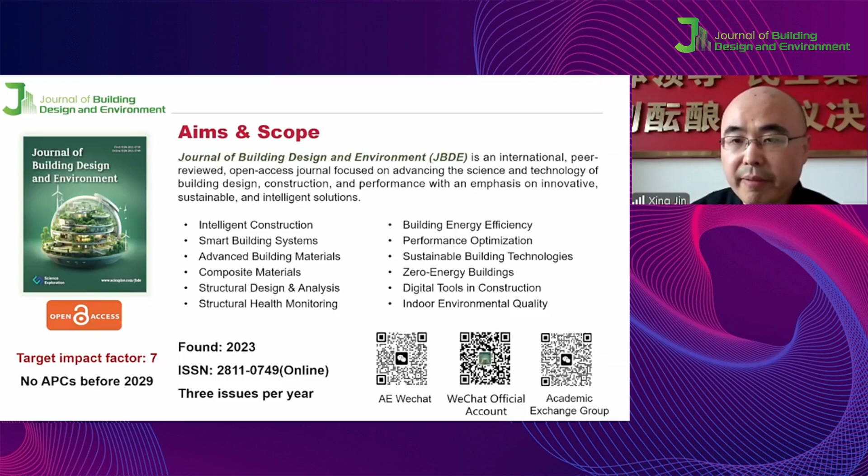You can call it the Journal of Building Design and Environment. This journal was founded in 2023, and we have 3 issues per year. Here you can see the aim and scope of the journal, including building design and structure, indoor environmental quality, etc. Our target impact factor will be 7 before 2029, and we will have no publication fee before 2029. We also have a WeChat account, so welcome all of you to follow and support our journal.

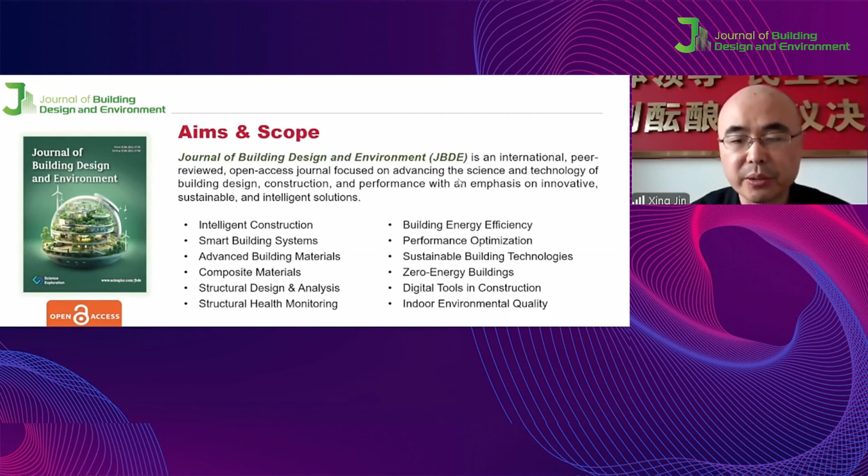The Honorable Editor-in-Chief of the journal is Jian Kang from University College London. He is also a very famous expert in architecture acoustics, and he is a foreign member of the Chinese Academy of Engineering. The 2 editor-in-chiefs are Professor Li Maozhang from Huazhong University of Science and Technology, and Xiangyu Wang from East China Jiaotong University. We also have 9 associate editors, including me, Professor Li from Guangdong University of Technology, Professor Duan from Tongji University, and Professor Hao from Xi'an Jiaotong Liverpool University.

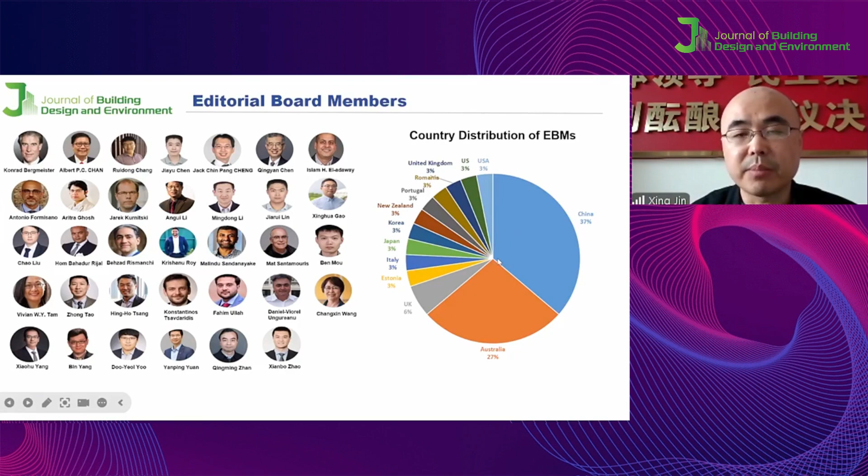They are all famous experts not only in China but also around the world. Most of the members are from China, Australia, and other Western developed countries. This year we also have young editorial board members. Right now we have 47 young editorial board members, and I welcome young scholars to join the young editorial members of our journal.

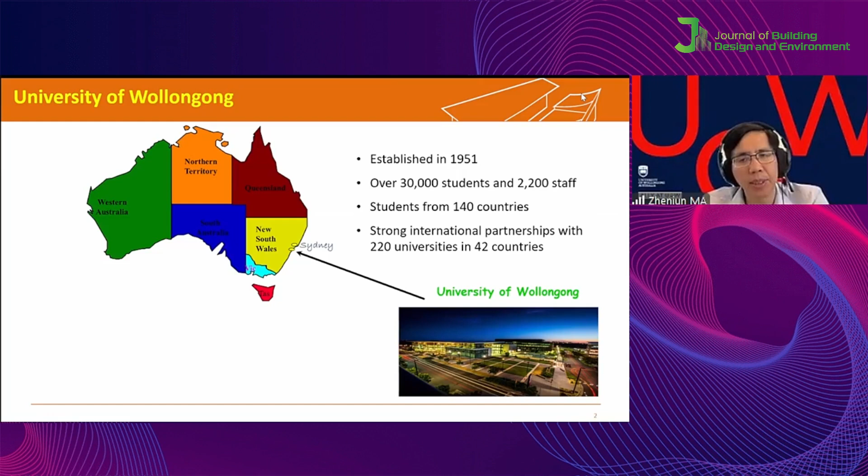Our university is around 70 years old, and we have over 30,000 students. We are really international, with students from 140 countries. You can see some local, quite famous places, and we always welcome visitors in our region.

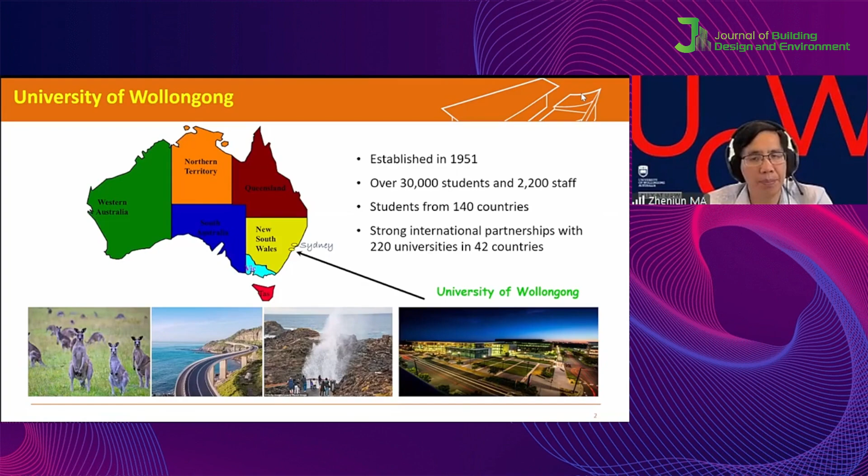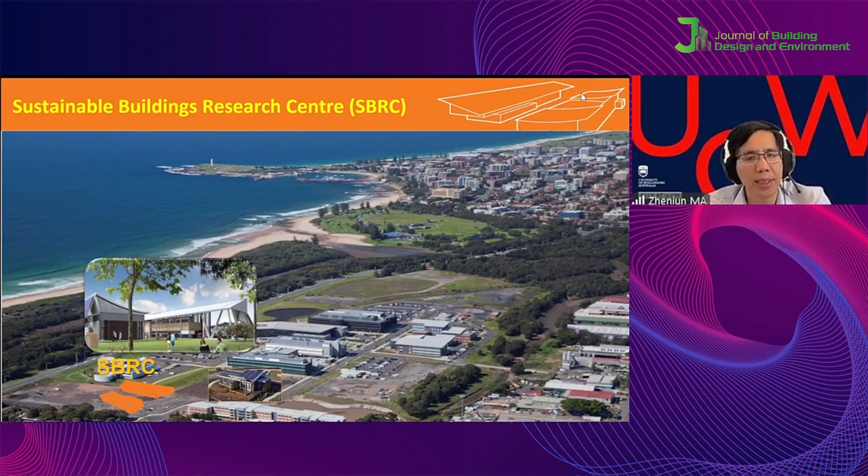This is our city, and my research group, SBRC, the Sustainable Buildings Research Centre, is here. It's very near the sea, only a 5 minute walk.

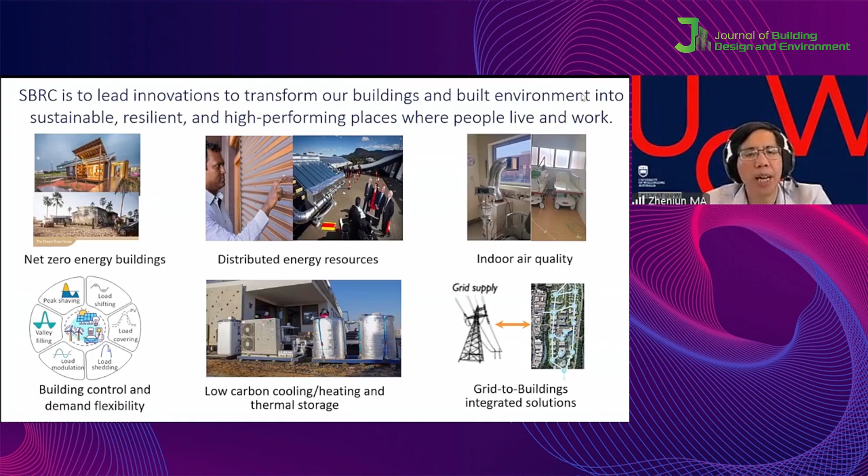Our team works on a range of research activities: net zero energy buildings, distributed energy resources, and indoor air quality building control. That's all part of our research activities.

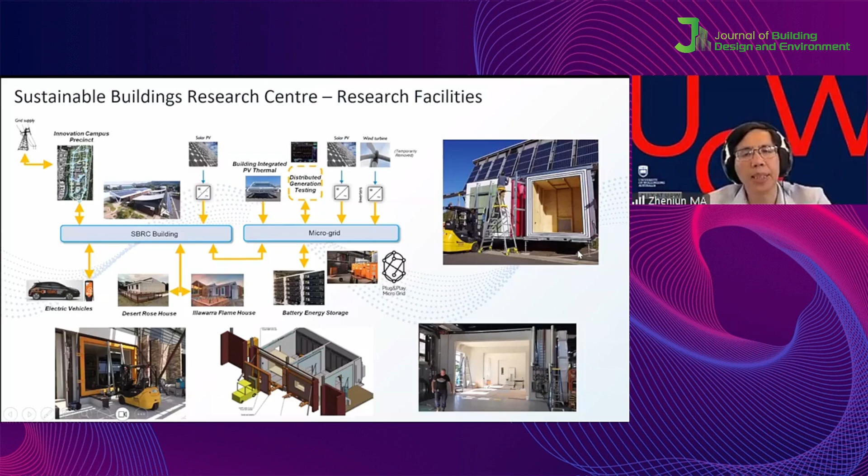We have also set up a range of living labs to support our student projects and research activities. We also have a range of research facilities, including the microgrid test platform, building integrated test facility, and outside test cells. These all support our research here.

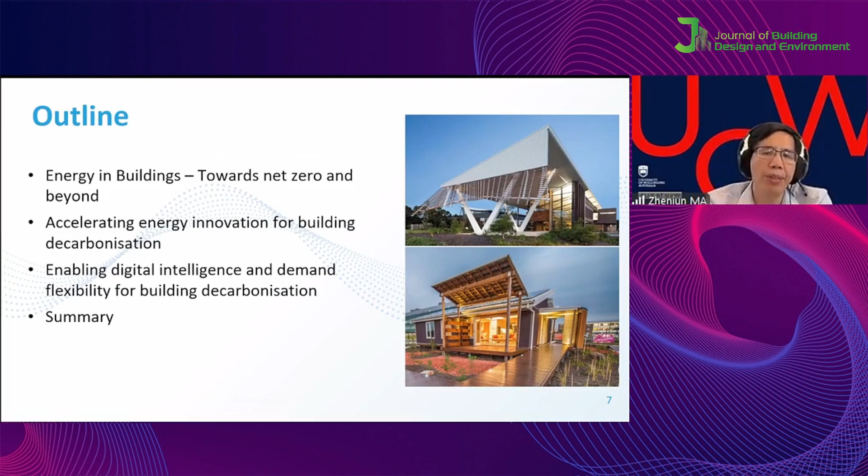For today's presentation, I will start with an overview of energy in buildings and key activities in Australia and beyond. Then I will give you an overview of the research activities my team is doing on accelerating energy innovation for building decarbonization, and digital intelligence and demand flexibility for building decarbonization.

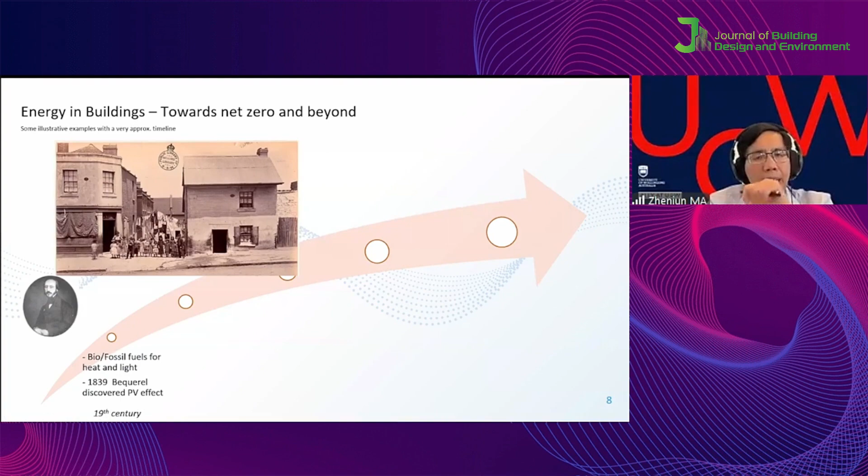This is the journey of net zero efforts from Australia and also in our team. In the 19th century, biofuels and fossil fuels were really used for heating and lighting. Then the PV effect was discovered by leading researchers. Then came the later part of the 1900s.

Solar thermal became common, and remote area power systems for off-grid homes also became popular. At that time, batteries and diesel backup were also used, and PV panels were increasingly used. Small-scale wind turbines were used, but that was not very competitive from a cost perspective.

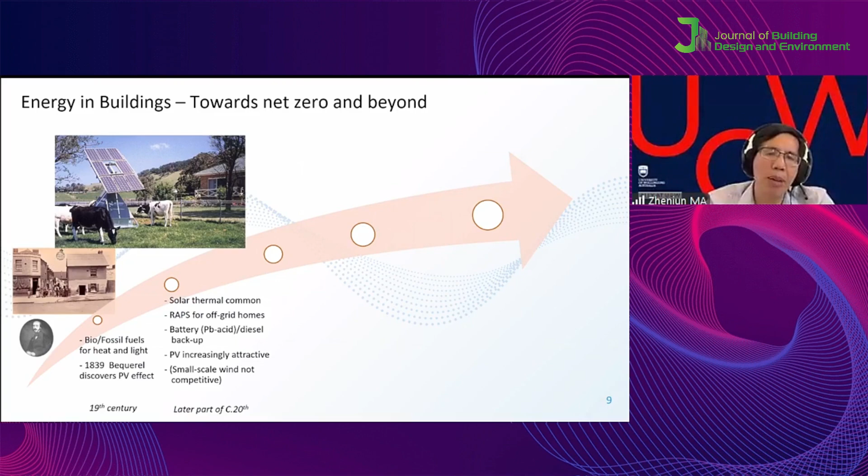Then came the 2000s. In Australia, we had our first 6-star building, the Council House 2 building in Victoria, Melbourne. In this building, they used a range of high performance technologies, including phase change material in the building for storage, load shifting, and load shaving.

The digital building management system was also used in this building. Many of you may know that in 2002 in the United States, they started the Solar Decathlon international competition.

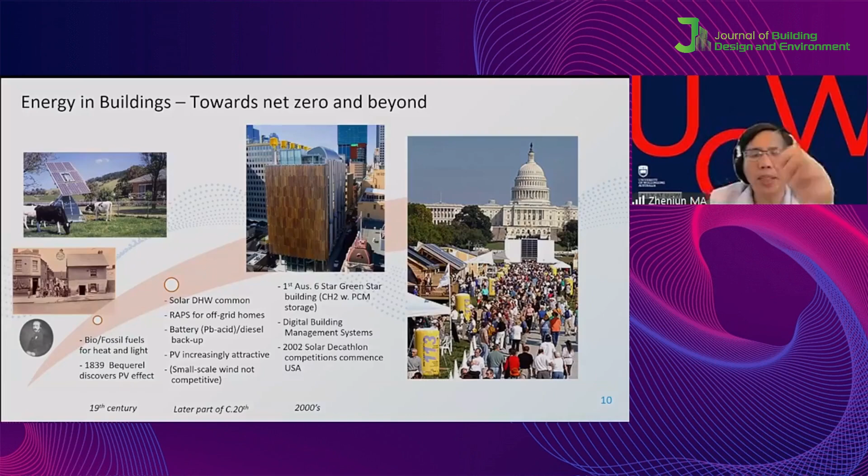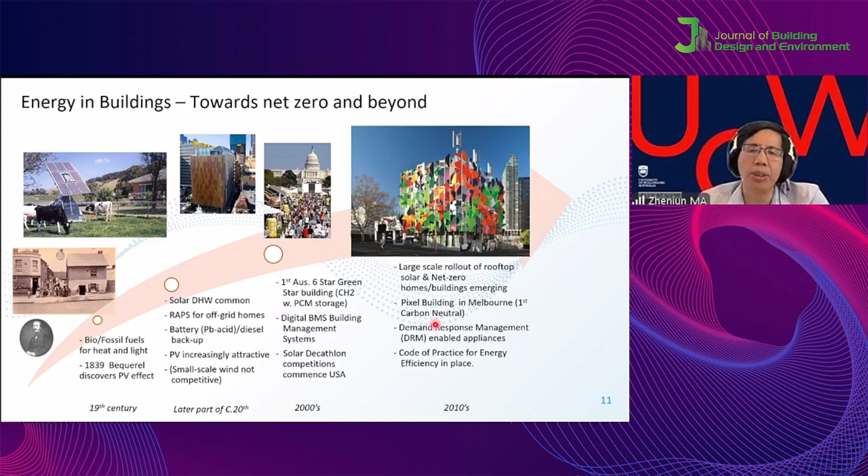Then came 2010, with large scale roll out of rooftop solar panels, and net zero energy buildings became very popular. In Australia, our first carbon neutral building was developed. At that time, demand response management enabled devices also became popular in homes and office buildings. From a government policy perspective, the code of practice for energy efficiency was also put in place.

So what's happening today? In Australia, 38% of homes already have solar panels installed, around 4.3 million homes. You can imagine these solar panels generate significant amounts of power during the daytime.

We need high interaction with the grid system, because during the daytime homes don't really need a lot of consumption, and most of the generation is exported to the power grid system. This causes a lot of issues for the stability of grid operations.

From 2015, around 3,000 megawatt hours of battery storage was installed, especially in recent years. The Australian government has put a lot of support into installing battery storage systems behind the meter.

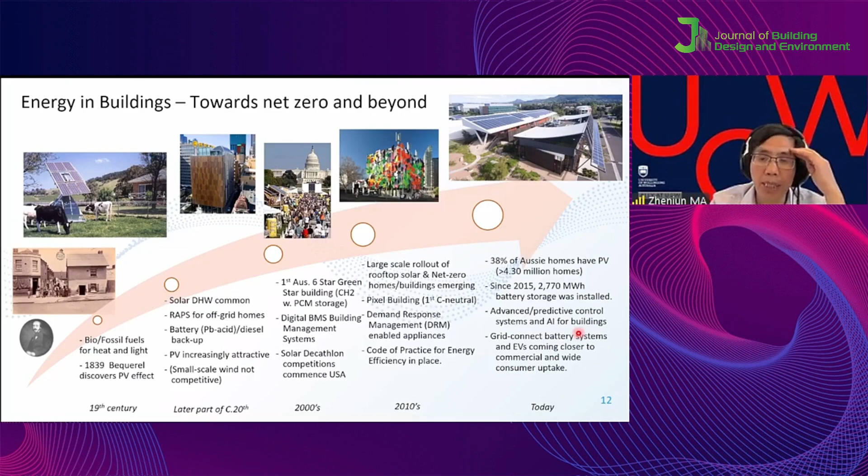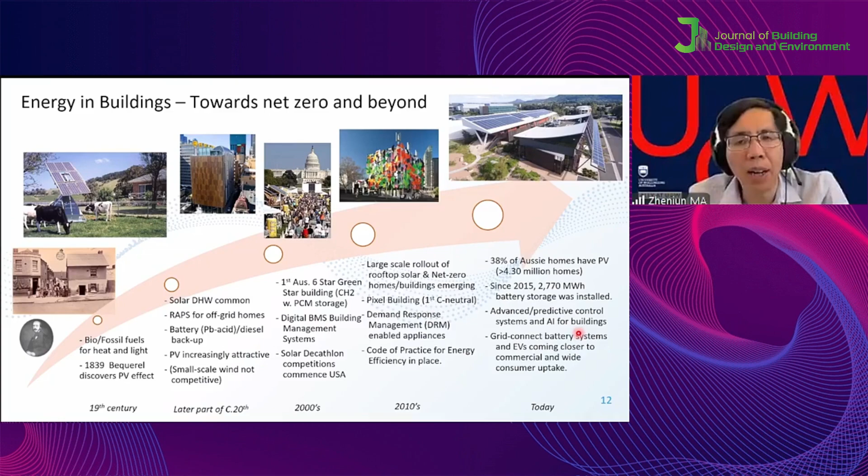Some of you work on advanced controls, such as MPC, model predictive control, which is also being tested in buildings, and AI technologies are also starting to be used in buildings. Lots of activity is happening on grid connected battery systems, and EV cars are also close to commercialization. You can see vehicle to building, vehicle to grid, and grid to building concepts - these are all topics currently under investigation.

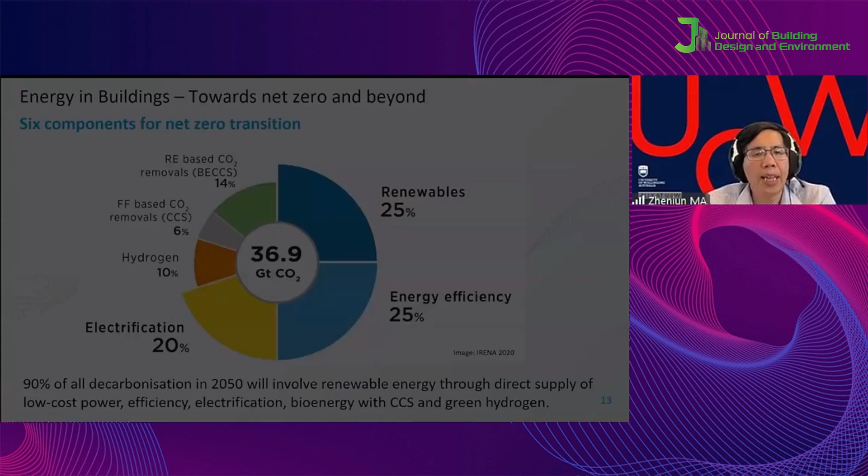Building decarbonization is not only for energy efficiency, we rely on a lot of technologies. Renewable technologies and electrification are also equally important. All in all, we need to look at all the different ways to reduce carbon emission from buildings. This is from a study by the International Renewable Energy Agency, which identified 6 components for net zero transition. This is an introduction to some work my team has been doing over the last couple of years on how we can help translate our research activity to reduce carbon emission from buildings.

One of the key technologies we studied is the transpired solar collectors. You can see on this facade we installed transpired solar collectors, with perforated panels containing a lot of small holes. If you look at this figure, they have a small fan in operation. When the fan is in operation, the pressure inside these channels will be negative. This is the perforated sheet. The outdoor air will flow through these small holes.

Because you have strong solar radiation on the facade, the air will be heated up, and under very good solar radiation on sunny days, this can reach 25 degrees or even higher hot air. This hot air can be directly introduced into the indoor space for space heating in winter. This technology is really based on good design principles, so the power consumption from the fan is very small. It's nearly a passive application using advanced design to facilitate heating in buildings.

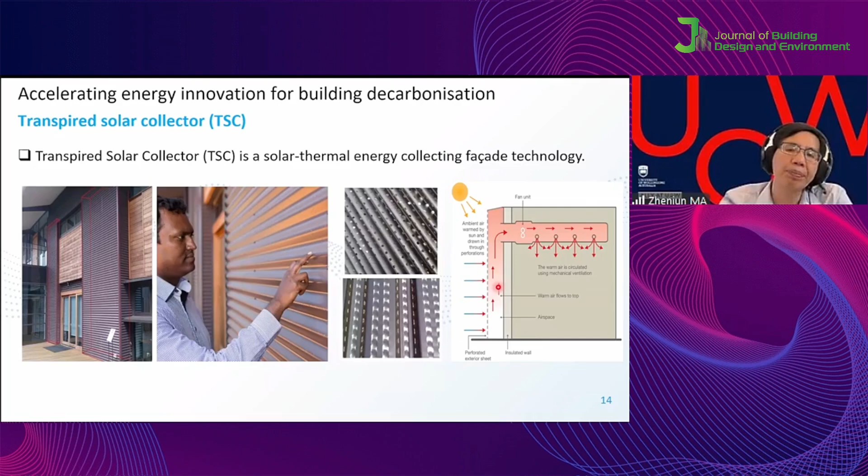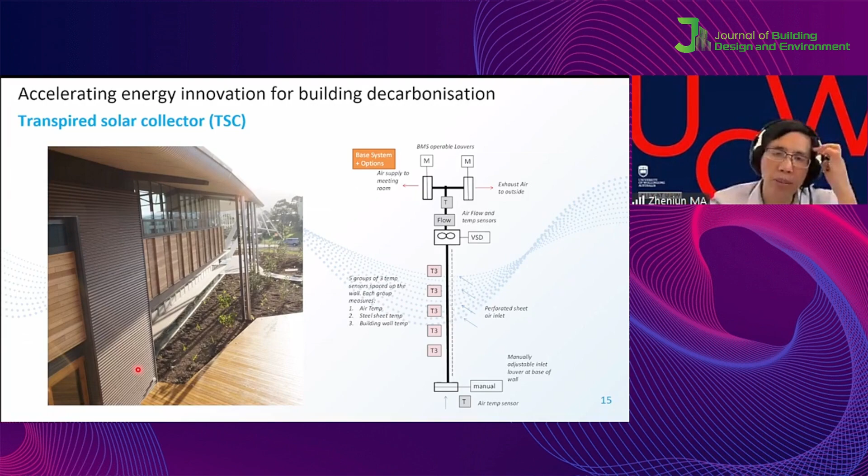We also did a range of measurements for this facade, installing a lot of thermocouples and flow meters to quantify the benefits. We also looked at the diameters for the holes, or opening a big opening at the bottom, to see which is the best option. We ran different scenarios to determine the optimal configuration and design principle to support this kind of facade technology.

Here are some measurements we did. When we look at different air flow rates, you can see the different outlet temperatures from the transpired solar collectors. In principle, with a smaller air flow rate you get a higher temperature. In good weather conditions, the outlet air temperature can reach 50 degrees C, which is very useful in wintertime for space heating.

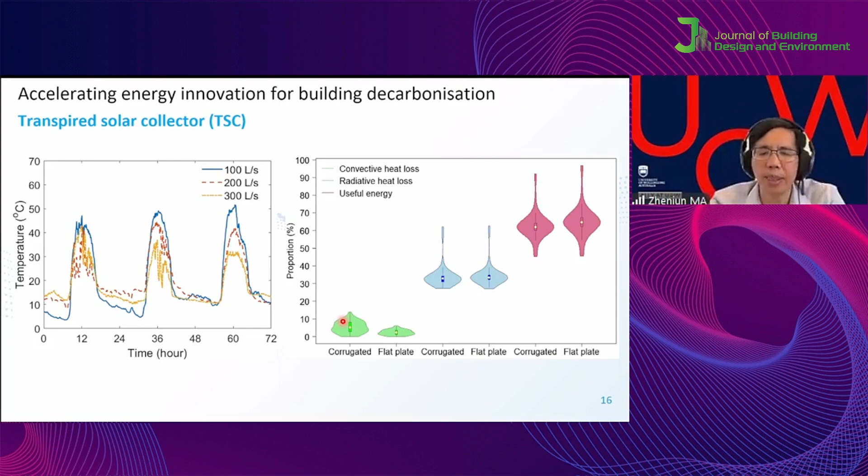If you look at the right side figure, we compared different types of panels - one corrugated panel and one flat plate panel - looking at the heat loss from the panels: convective heat loss, radiative heat loss, and useful energy. This is really about how to ensure a very good design to make buildings more efficient. That's one technology, and we also looked at options to integrate thermal storage.

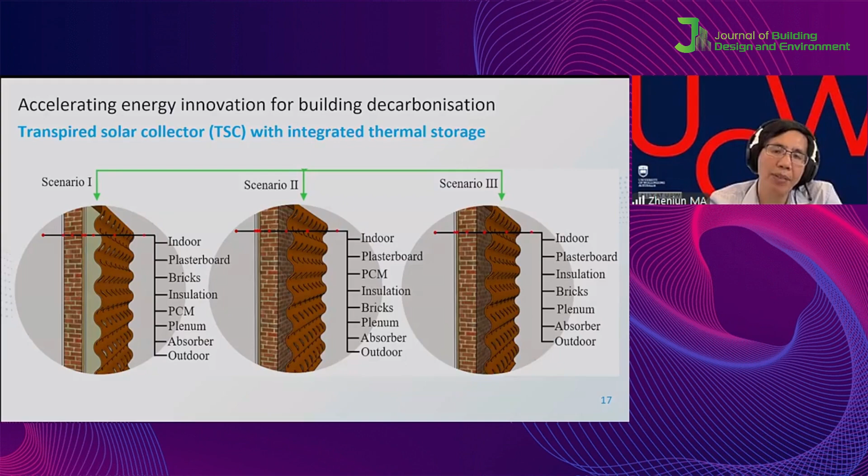In this case, it's combined with phase change materials, which you can either install in the internal layer or outside next to the perforated panels. We also have the scenario without using any thermal storage materials, to see which one provides better results or outcomes. This is some simulation work based on these 3 scenarios, looking at the indoor air temperature perspective for the winter scenario.

We need a higher indoor air temperature. You can see that when you combine the transpired solar collector with thermal storage using phase change material, they show a higher indoor air temperature. The temperature seems very similar when compared with the transpired solar collector alone, but both are much higher than the baseline scenario.

The benefit of phase change material really relies on the way you place the material and how much material you use - there are a lot of factors. If you look at the right side figure, this tells us the average room temperature when the fan was off, without fan, across different days.

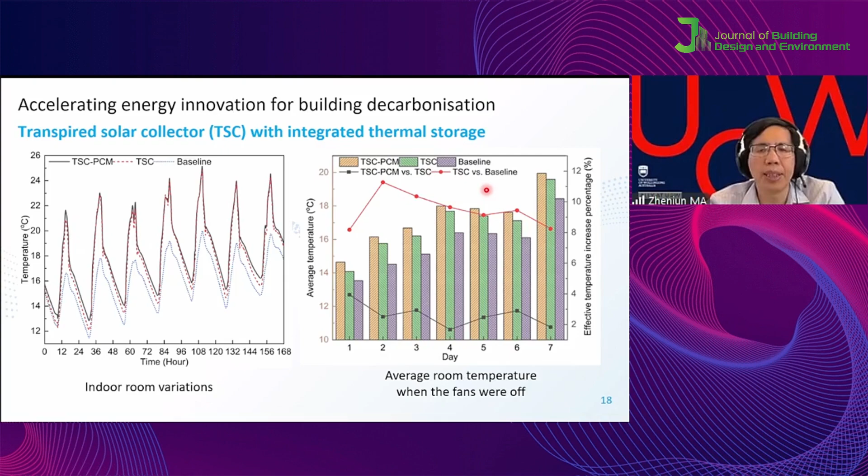If you have the transpired solar collector and thermal storage using phase change materials, you can have, in principle, a higher average temperature compared to the other case. So this really demonstrates the value of the transpired solar collector and phase change material. But behind this technology, there are lots of design issues and design optimization.

So the second technology we developed is the photovoltaic thermal system, PVT. In our case, we developed an air-based system. Why did we develop an air-based system? In Australia, you can see a lot of roof structures are like this, still steel roof structures. So the idea is we can retrofit existing buildings by using this existing roof structure.

For instance, in this roof structure, you have lots of valleys. So the idea is to just put a layer of thin film PV panel. You have one layer of PV panels, and you can use these valleys and channels for the air channel. So this is a very low cost retrofit solution.

This PVT, in the summer daytime, gives you PV generation and hot air generation. Many of you may know that when the temperature of solar panels increases, the efficiency for electricity generation decreases. So if you have air passing through below the panels, it can reduce the temperature of the solar panels and can slightly increase the electricity generation efficiency.

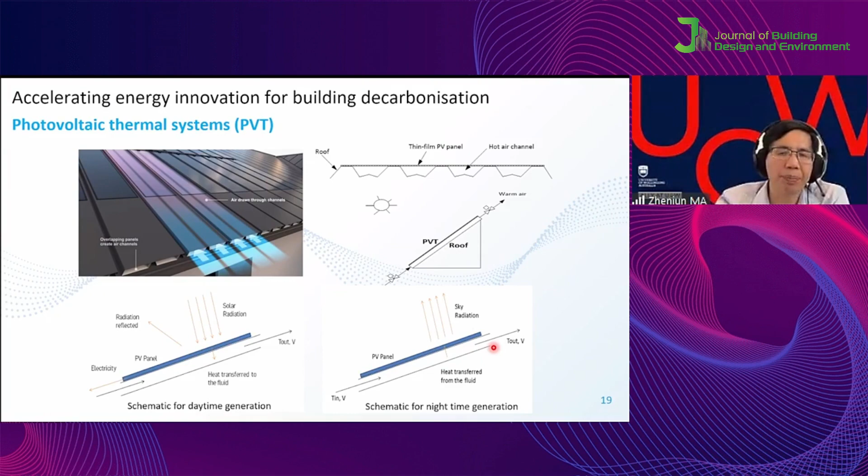We also look at how to increase the performance of these kinds of panels. For instance, we look at the combination of PVT and the solar air heater together. This really tries to increase the outlet air temperature from the PVT system. We also look at using heat pipes to increase the outlet air temperature.

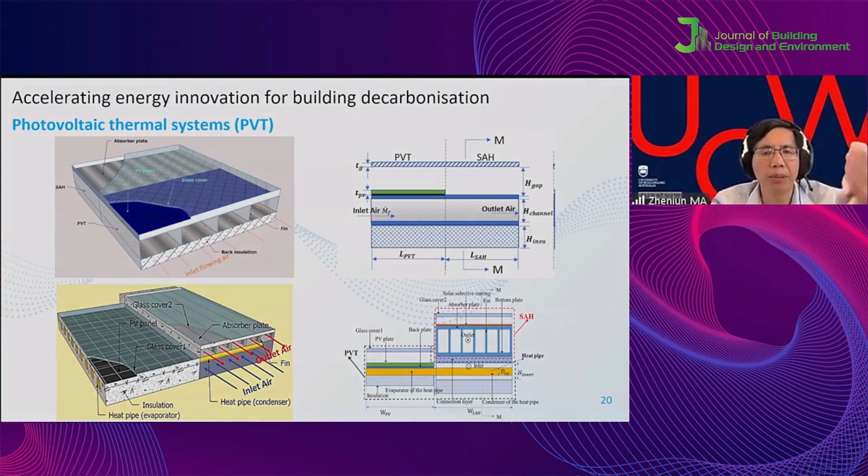They really track the solar radiation. You can also change the slope of the panels, because the slope of the panels is also a factor influencing the efficiency of the PVT system. You can also vary the air flow rate to test the performance of such technology.

To look at the integrated performance with thermal storage, we also installed a thermal storage system to store the hot air from the PVT system. In this case, we use salt hydrate material and put it in brick style, placed in the channel, to measure and evaluate the performance of such an integrated system.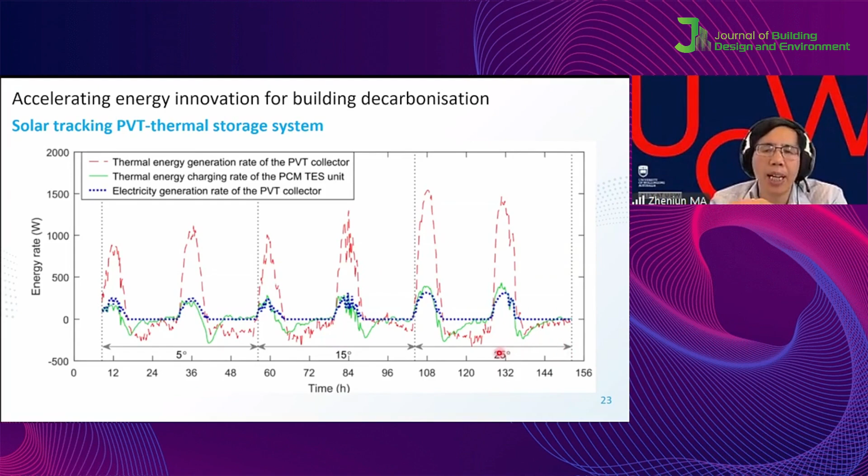And you can also say, from the slope of the panels, you have different slopes and different efficiencies. This really depends on the climate conditions and location where the PV panel is installed.

We also look at the combined PVT system and thermal storage integrated with the HVAC technologies. So this is one example we developed. We have PVT collectors and a PCM thermal storage integrated with the air handling unit, which is integrated with the heat pump unit. This system can provide different options.

For instance, in the wintertime, you can directly supply hot air to the buildings, or you can preheat the air, then use the air handling unit to further heat up the air. Or you can charge heat into the PCM storage and use it later when needed.

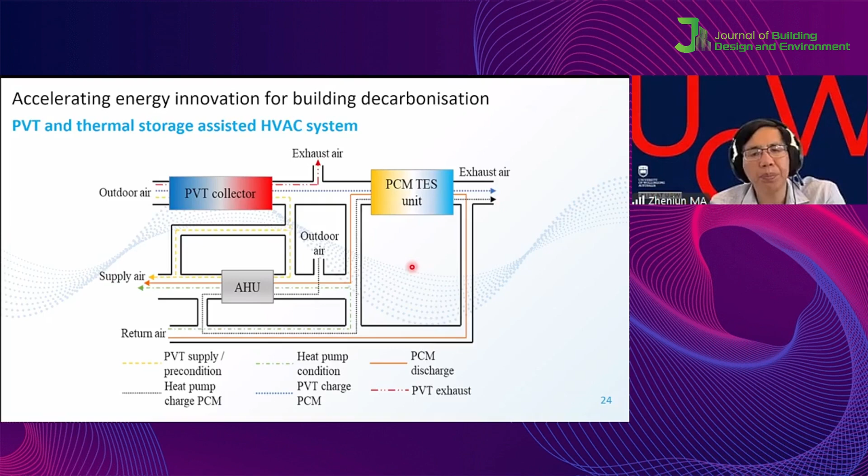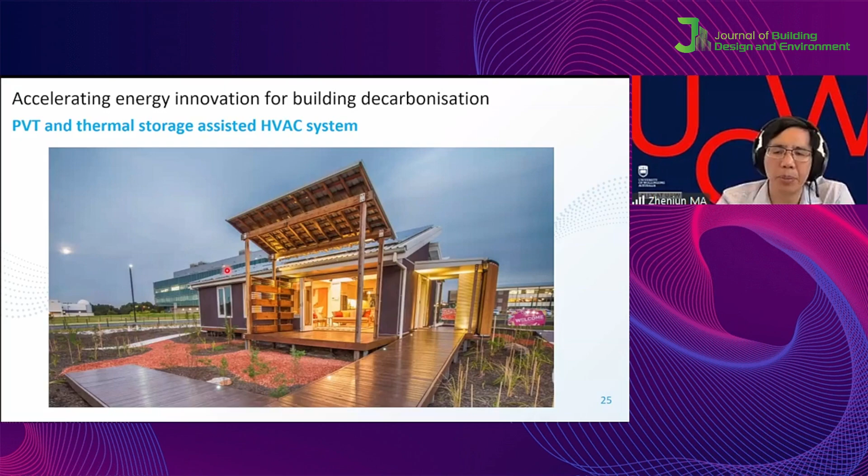So we installed this system in this net zero energy building, underneath the house. We installed this thermal storage, and the PVT is on the rooftop. This part is our PVT system, and in this system you can see this is our air-based PCM thermal storage. We installed it underneath the building, and this is our control infrastructure.

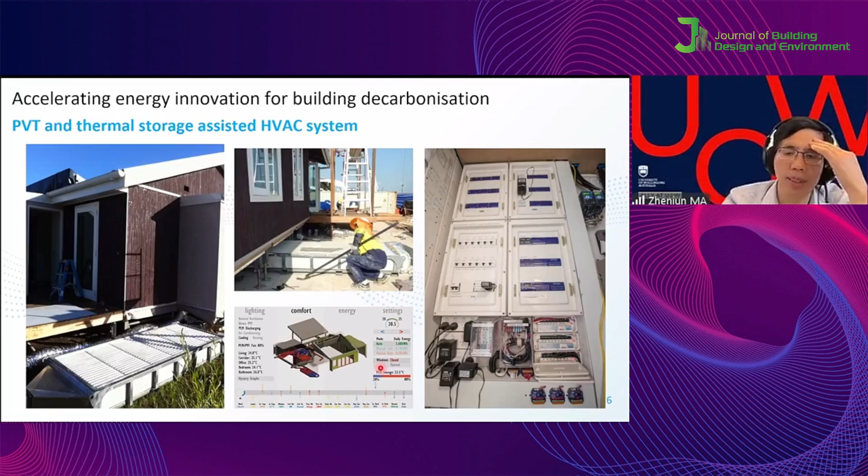We developed this to optimize operation for the PVT, air conditioning, and thermal storage through this interface we developed. Here is an example of the hybrid model predictive control we developed for this system.

We use two different layers or levels. One is the high level controller, which really determines the operation mode of the HVAC system, for using the air handling unit for heating or cooling, or using the PVT for preheating. This is based on a time interval of 1 hour.

Then we have a number of low level MPCs to optimize the local level, such as the PVT air flow rate, and the charging and discharging of the PCM storage. All this is communicated from the JACE controller, and we use LG air conditioning, the JACE controller, the C-bus, and the weather station.

So that is really a demonstration of the performance of the air conditioning system and also high performance advanced control strategies. In this case, we use MPC.

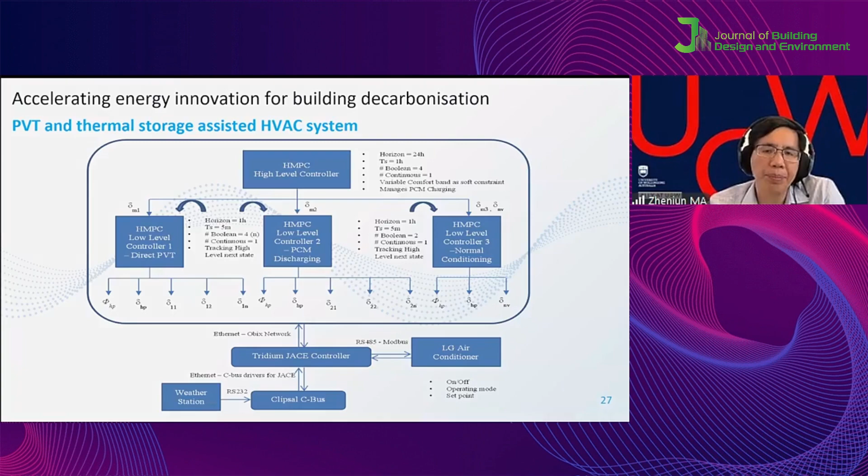This is some measurement data. You can see, in principle, the indoor air temperature is within the required threshold, that's the upper limit and lower limit for thermal comfort. For instance, this time we use the PVT for pre-cooling, and here we use the PCM for discharge. So this is one example.

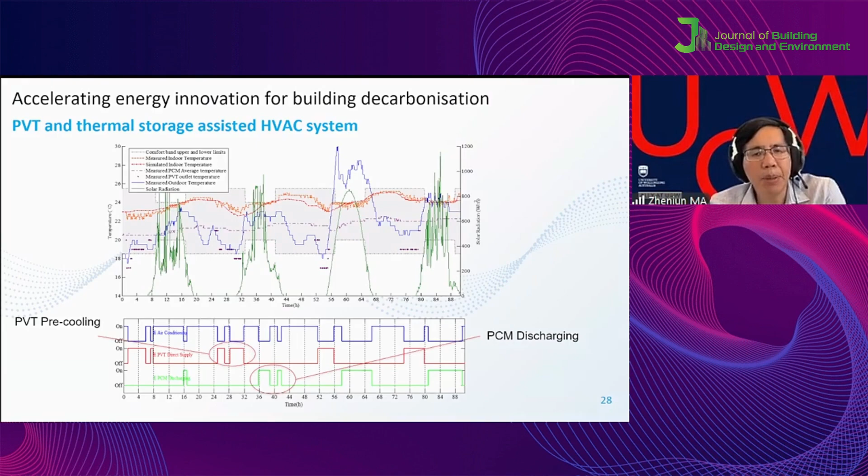We also have another example installed elsewhere. In the previous one we used an air-based system, but in this case we use a liquid-based thermal storage, that's the two thermal storage system. We still use phase change material integrated with heat pumps, and we also use energy recovery ventilation to try to reduce the power consumption of buildings.

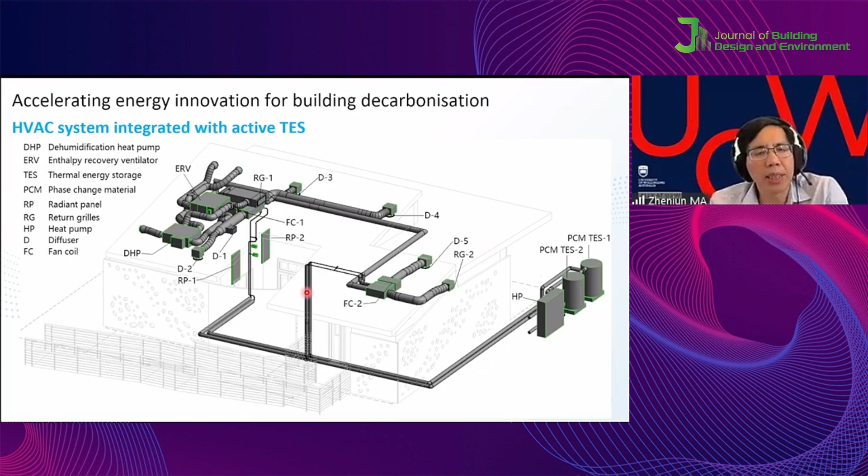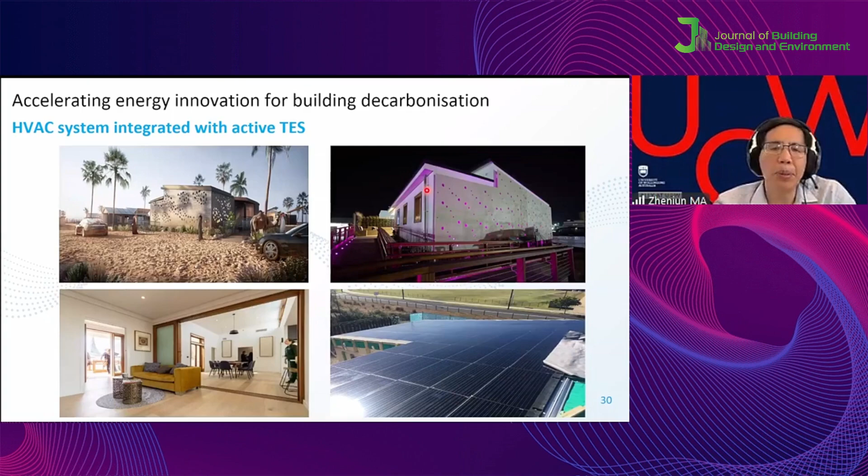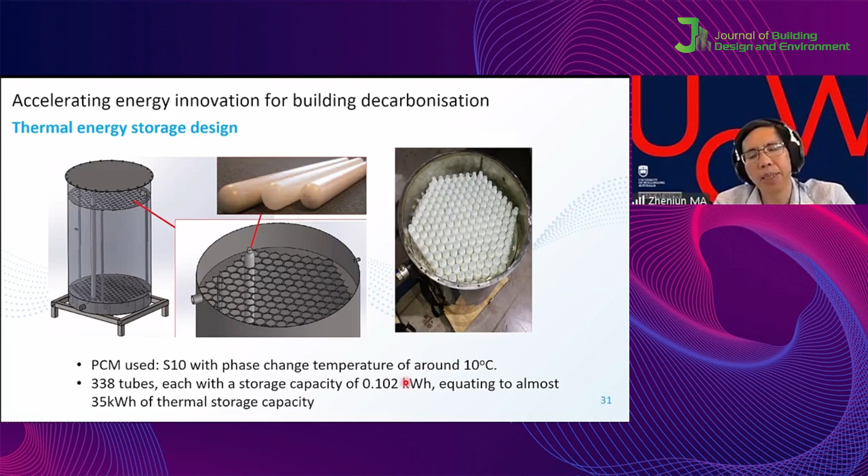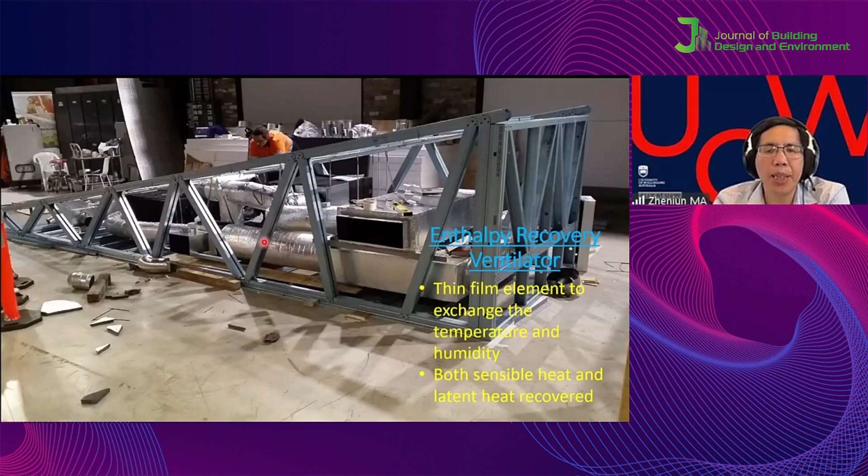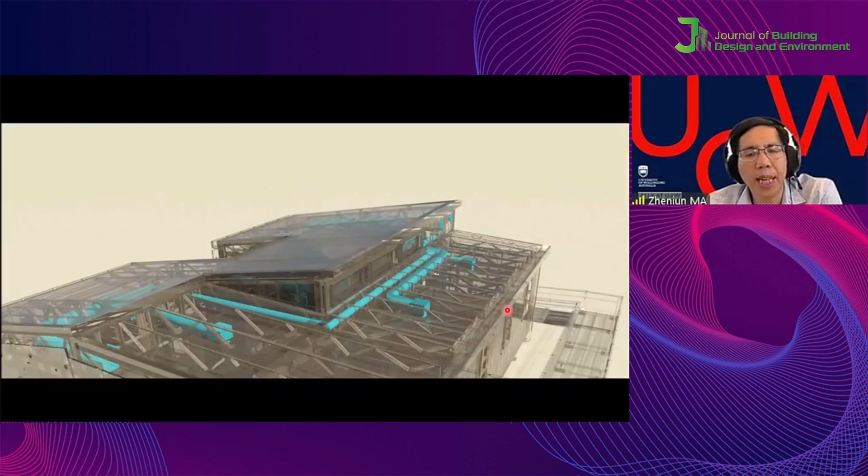You can see these are the 2 PCM tanks we installed in the building, integrated with a heat pump unit to provide heating and cooling. This is for the real building installation. We also have an enthalpy heat recovery ventilator put in the cage of the building, installed on the roof of the house. You can see that's our layout for the air conditioning units, the ducting system, PCM thermal storage, and heat pump unit installed.

In the design stage, especially for the PCM tank, we looked at different options for the diameters of the tubes and the distance between tubes, and also looked at different PCM types and what the inlet water temperature would be. So that is collectively a complicated design optimization.

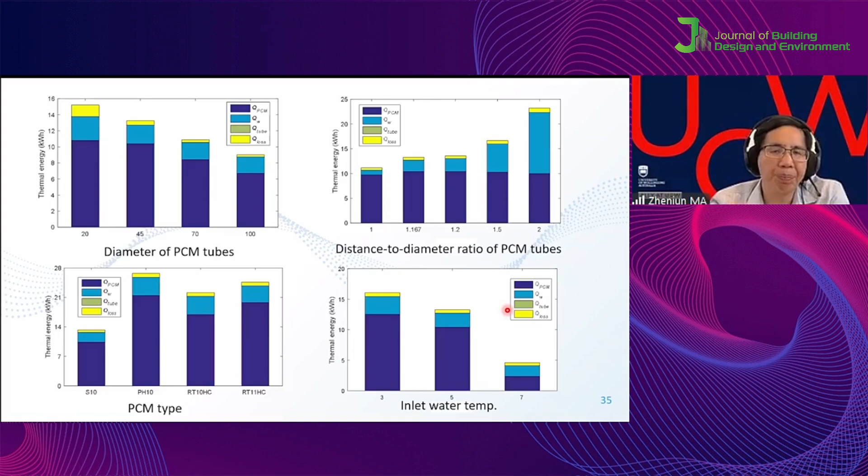So for this system, we also developed MPC, model predictive control, to control the lights and HVAC, and we also have PVT and a monitoring system, and a storage system. We have a 6 kilowatt electrical storage. The purpose of the MPC is to control the real-time power below 80 kilowatts.

That's because that's a very hard target. The red dashed line is before implementation of the controller, and the yellow curve is after implementation of demand response programs. But even with the demand response program, where we shift the demand time, the total power is still above the limit.

Then we implemented this MPC controller, and this is our target. You can see we didn't exceed the limit. At this time we increased the power consumption, and at peak demand time we reduced the power consumption because of the predictive function of the MPC.

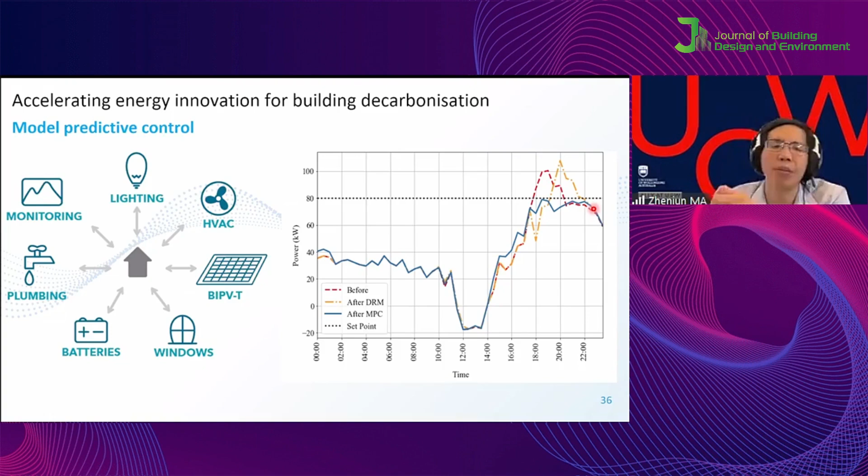Another technology we developed is the air-to-air membrane enthalpy exchangers. In the HVAC system, ventilation consumes a lot of power, so we looked at ways to achieve enthalpy recovery ventilation. We looked at this kind of configuration, and this is really membrane-driven technology. So our work is really to look at MOF.

Many of you who work on the material side know that MOF is metal organic frameworks. We have coatings of different materials on the membrane to look at how they can improve heat transfer effectiveness. This shows the two different types of coating material using the MOF, and for the air, this is the supply side and this is the exhaust side. We look at the coating material on this side or the other.

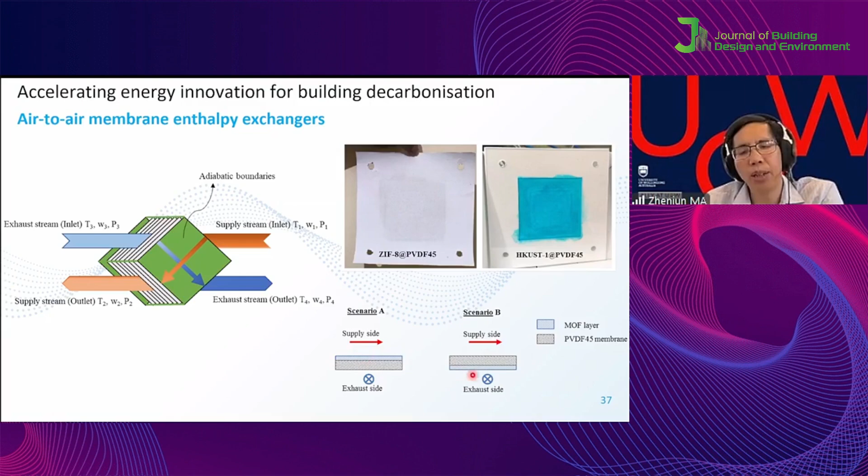We have an experimental setup. You can see we use this acrylic frame to prepare the composite membrane. This is the key test section for the membrane technologies, and we set up this kind of experimental setup.

These are the environmental chambers to control the inlet temperature and humidity. We have two of them, to control two different streams of air. This is the membrane enthalpy heat exchanger, and inside is really this part. We have a vacuum pump, and this is a flow meter to measure the performance of such enthalpy exchangers.

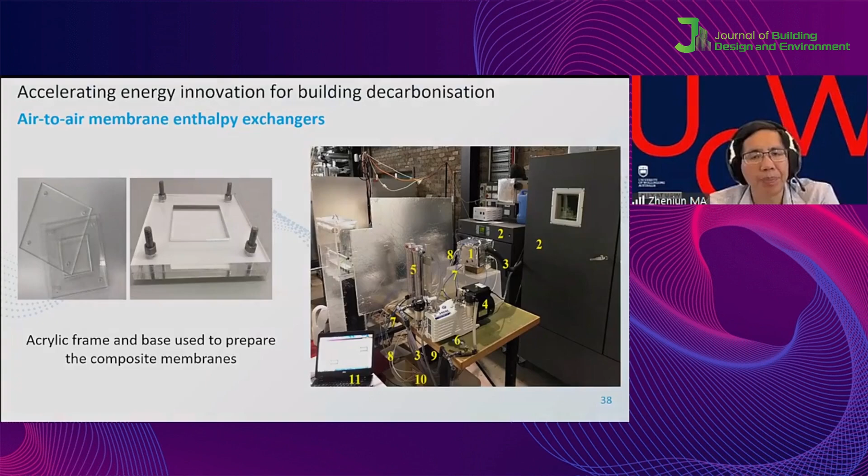Through coating this special layer of MOF, the moisture diffusivity of the membrane material is increased a lot. One of the key performance indicators is the water contact angle, measured through advancing and receding measurements. Once we have the coating materials, they really improve the heat transfer effectiveness.

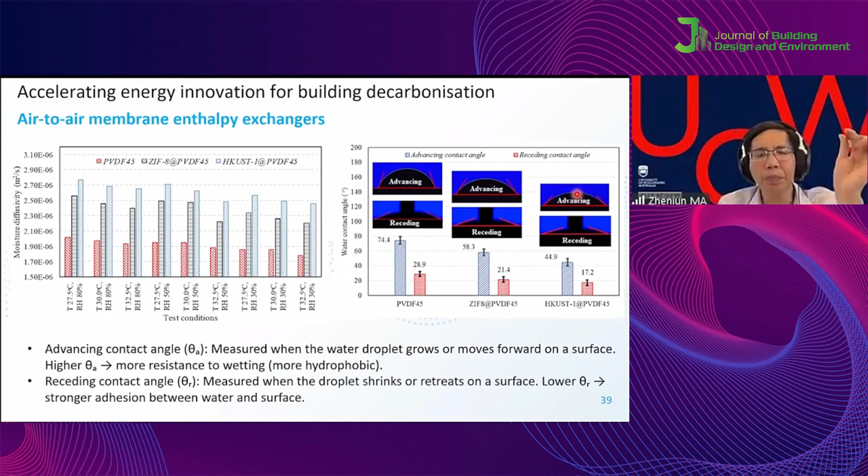So this is really from an energy innovation perspective. For the second part, I will give a quick overview of the work we did on demand flexibility and digital intelligence. Demand flexibility and digital intelligence are really interconnected.

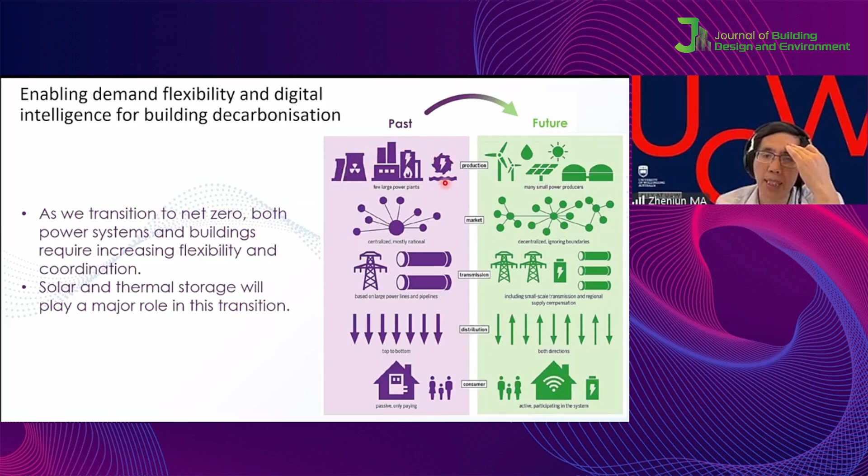In the past, the power plant or electricity grid provided power from a few very large power plants. But currently, and in the future, we have many small-scale power producers, off-site solar panels, remote area solar panels, and grid-side systems. In the past it was all centralized, mostly at the national level, with a number of large power plants, but in the future we'll have decentralized systems alongside many smaller ones.

They don't have very clear boundaries between each other. In the past it was based on large power lines, but in the future it's all distributed energy lines. In the past we always used a top-down method with only one-way communication, but in the future it's two-way communication. That gives a lot of opportunities to optimize buildings and the grid at the same time, but on the other hand it increases the complexity for optimization, because in two-way optimization you have a range of increased factors and complexities for the optimization problems.

So we have been working on a number of projects. One is what we call the digital infrastructure for flexible demand. We have a number of research organizations and industry partners looking to build up digital infrastructure for flexible demand.

The overall objective, from the end user perspective, is to reduce their operational cost. From the system integrator perspective, we try to enable the existing supply chain and make sure it's smooth and easier. From the electricity retailer perspective, they try to reduce flexible demand delivery risk and reduce their transaction cost. From the data analytics providers, they try to reduce cost for their service provided, and from the government regulator perspective, they try to enable policy interventions.

So this is really an integrated solution with multiple stakeholders involved. This kind of digital infrastructure can make transactions easier, and also increase end users' confidence to participate in demand side management, ensuring it is financially viable and cost effective. This is the main purpose of building up such digital infrastructure.

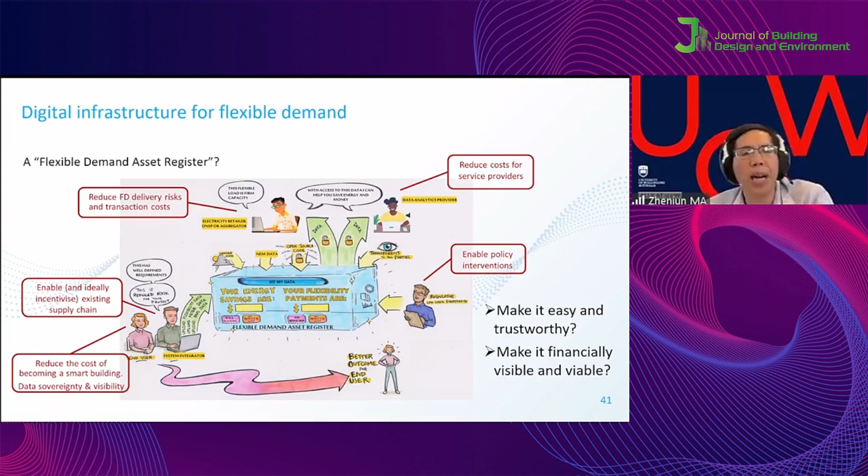In office and residential buildings, we have a range of flexible demand assets. For instance, you have electrical hot water systems in the home, chilled water systems, and other air conditioning units. That's all flexible load, meaning they can change their demand and consumption. Some buildings have thermal storage, most have a water tank, and some, like the one I mentioned at the beginning, have PCM thermal storage.

More importantly, all building envelopes have thermal storage capacity. For large scale buildings, they have standby generators and renewable generators, as well as stationary batteries and EV batteries. These are all the flexible demand assets we can use in our buildings to increase demand flexibility and reduce operational cost. These are some examples.

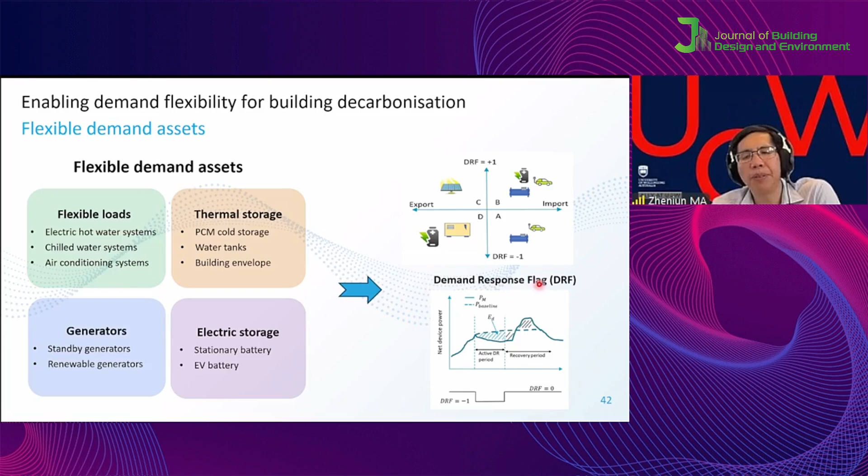We worked together with our partners to look at how to quantify demand flexibility. We introduced a concept we call the demand response flag, which either increases or decreases the power, because sometimes we need to increase power consumption and sometimes we need to decrease it.

For all the flexible demand assets, we look at the demand flexible capacity, meaning how much demand flexibility they can provide using this kind of device. We also look at the duration of the response, how long they can provide the demand flexibility, and the activation time delays. For assets with storage, we also look at the storage volume and round trip efficiency, or minimal time between events for charging and discharging. Those are all the factors we consider.

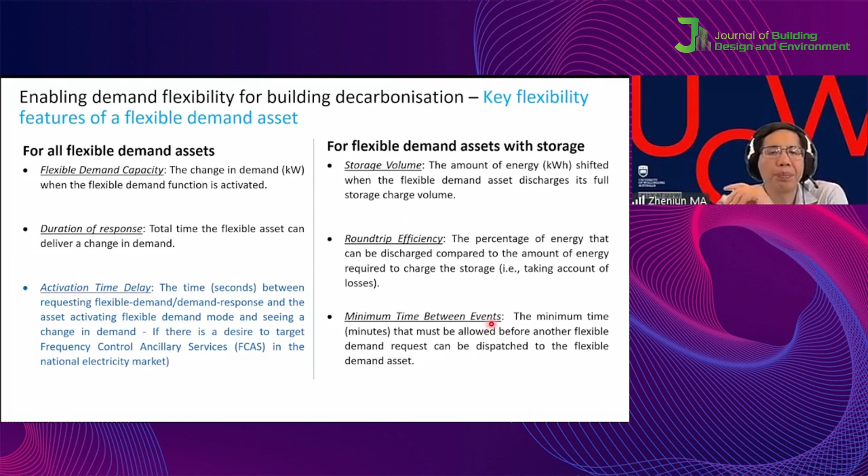So the idea is to make this demand flexibility quantification online, recording it in progress. That's our major purpose in building up this digital infrastructure.

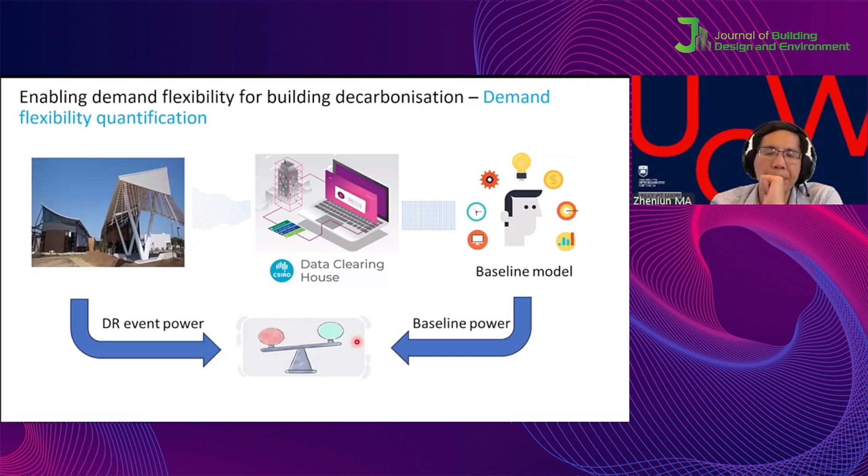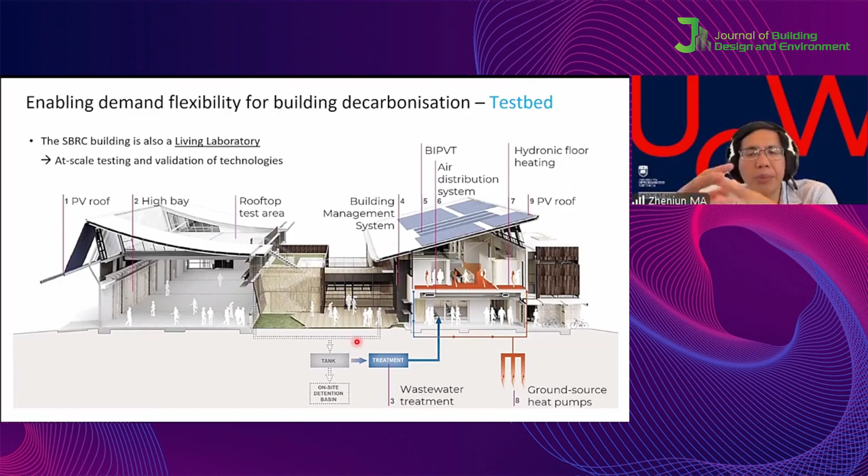We tested some buildings, for instance this is our office building. We integrated and onboarded it to this platform, and ran a range of tests on the air conditioning units and different demand flexibility assets in the building. This is the BMS system, which monitors and collects all the data from the building.

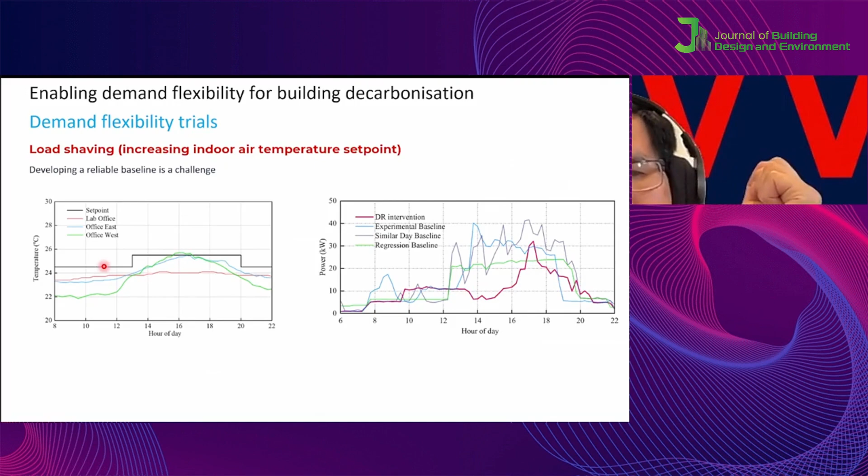You can see some real trials in the building. This is the load shaving test. You can see that at this time we increased the set point for the air conditioning, and for different office areas or rooms, they cannot really reach the set point exactly. For instance, the set point is 25.5 degrees C, and many of these three thermal rooms didn't really reach the set point. So in a real building, it's a real challenge to set up a reasonable or reliable baseline condition.

If you look at the right side figure, this is when we have a demand response event, showing the real measured power consumption. We use three different ways to determine the baseline, meaning we estimate what would happen to the building without the demand response program.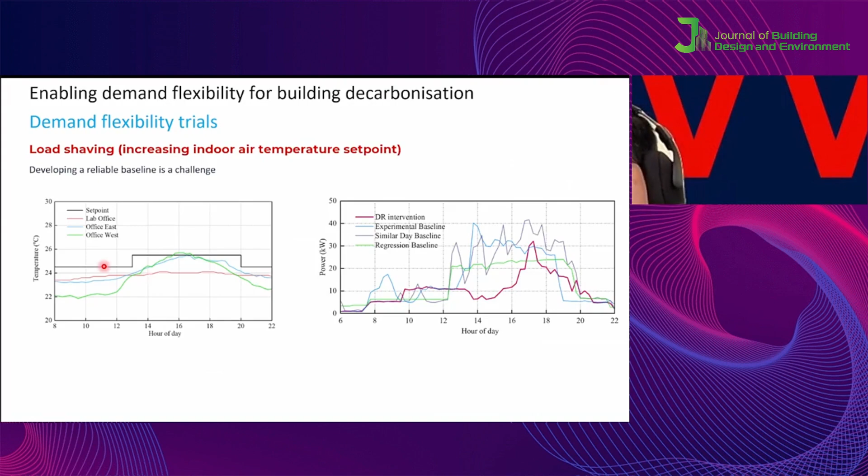So you can see we can use the experimental baselines, the similar day method and the regression method. They all come up with different baselines, so this makes it extremely difficult and challenging to determine how much savings come from the demand response test.

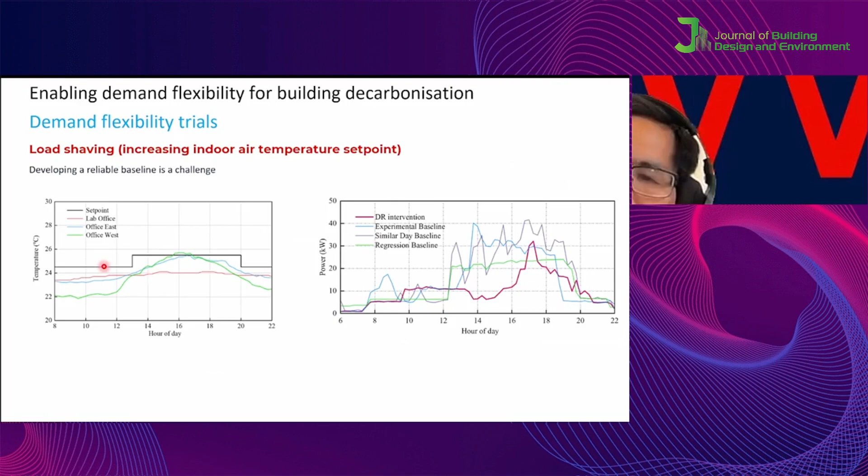So this is another example for load shifting. We decrease the set point before the peak demand time, and then increase the set point to reduce power. You can see we can simulate the grid operations and provide a signal to the buildings to control the power.

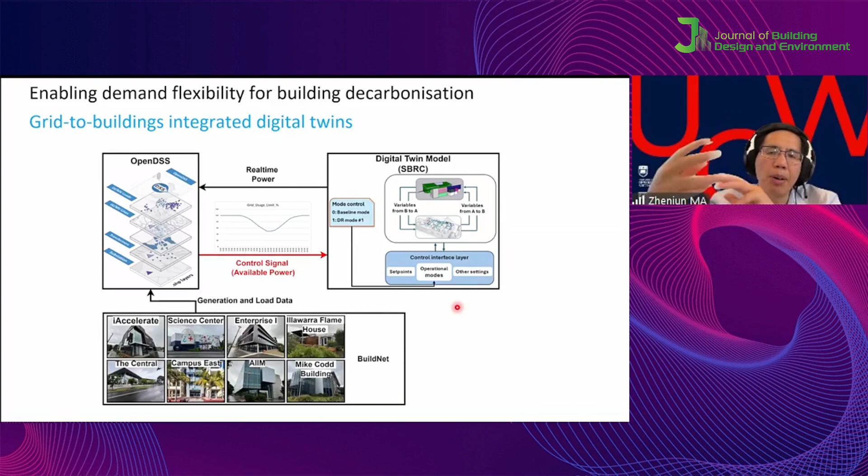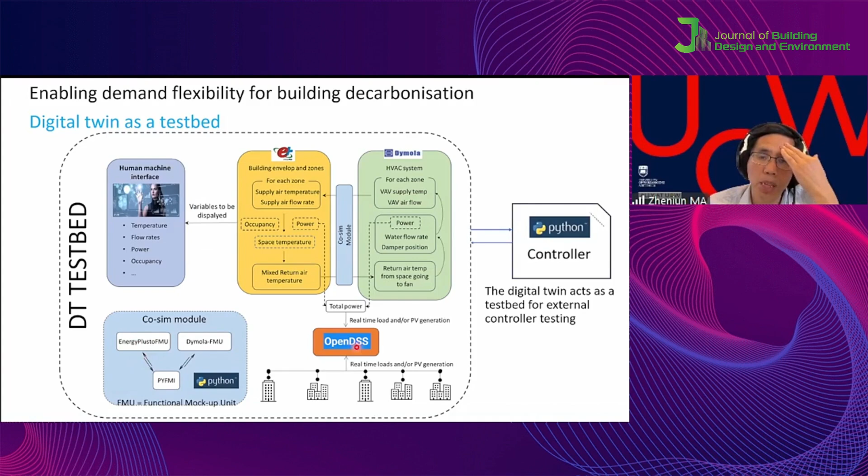This is the real tool for two-way communication to support demand side management. For instance, this is a digital twin model we developed. We used EnergyPlus for the building envelope and Dymola for the HVAC, coupled through a Python program, through OpenDSS, and we also have a human-machine interface, so all the controllers can be implemented and tested through this testbed.

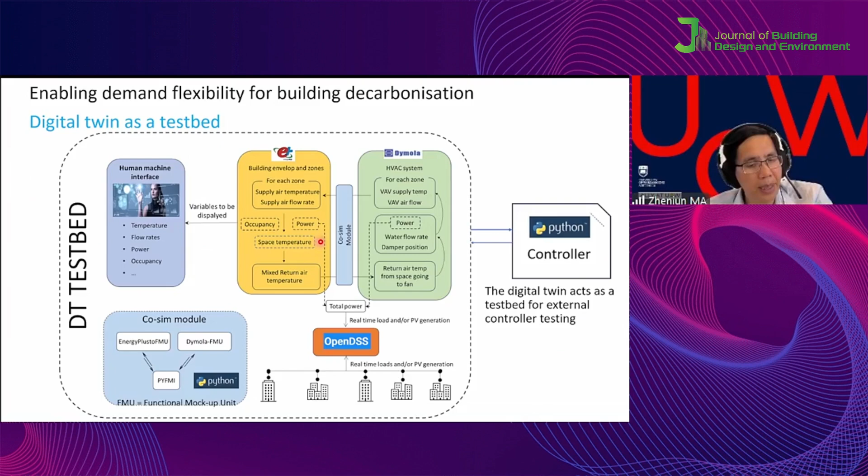And I think that's a quick introduction, and that's my presentation.